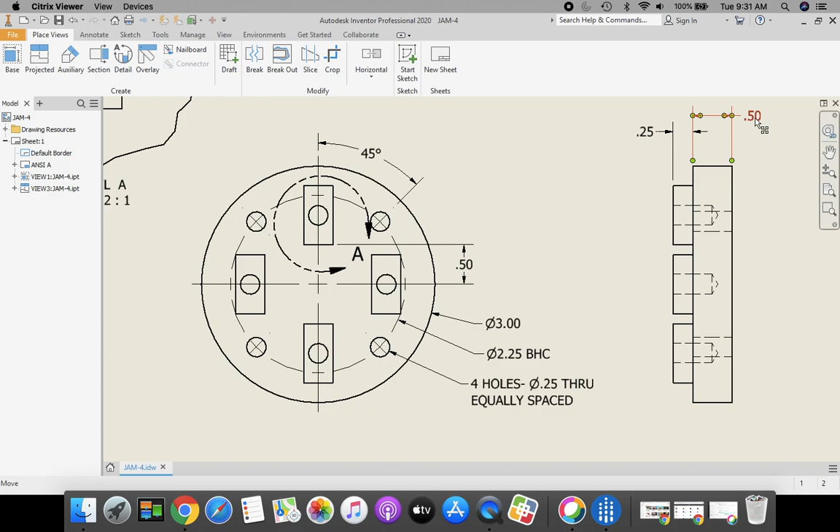Starting off, we're going to start with our 3-inch outside circle, which is this area right here, and we're going to extrude it back 0.5 inches. Some of the things we're going to be taking a look at today are techniques where we use construction lines and a bolt hole circle. We're going to introduce a new tool to you, which is called a 2-point rectangle. We're going to be doing something new as well, fixed circular pattern for those islands.

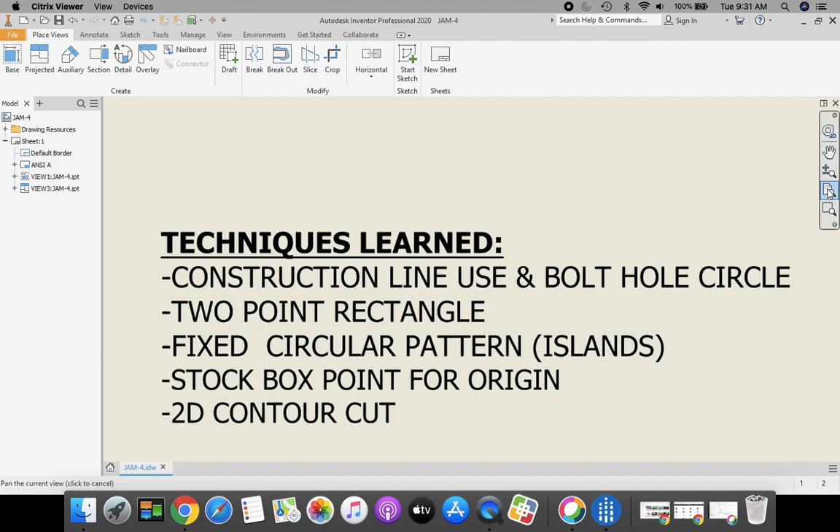And when we start CNC milling, we'll do a stock box point for our origin, and we're going to do a 2D contour cut. Also, we're going to be showing you how to enter into that detail view up here as well. Okay, so let's have a little fun today on Jam part.

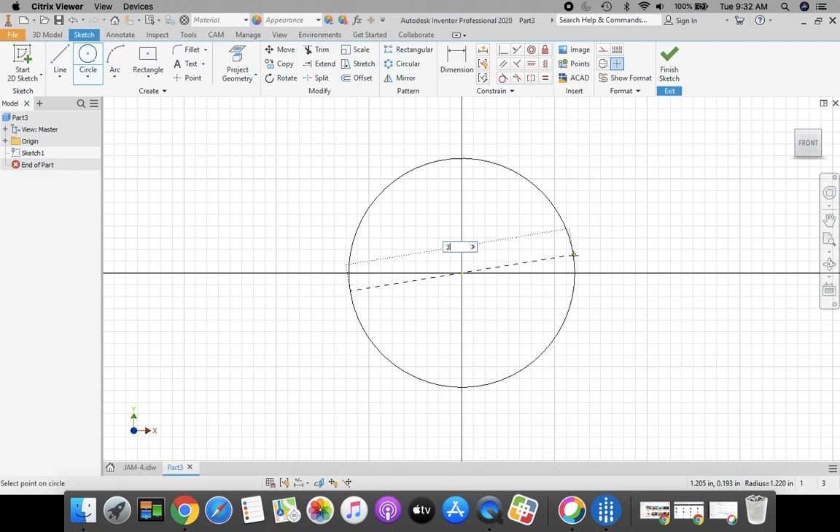From our main Inventor screen, let's go to New, Standard IPT, and click Create. We're going to begin with a 2D sketch from our XY plane as always, and click Front in your View Cube. Starting off with my circle, I'm going to start at the origin, get my green dot, stretch out a circle. This is going to be 3 inches. Press Enter on the keyboard. Green check mark, Finish Sketch. I'm going to go home.

I'm going to extrude next. I want to extrude, as always, my first extrusion, direction number 2, which is that flip direction. And I'm going to enter in a distance here of 0.5. Press Enter on the keyboard to show it, and then click OK on your menu.

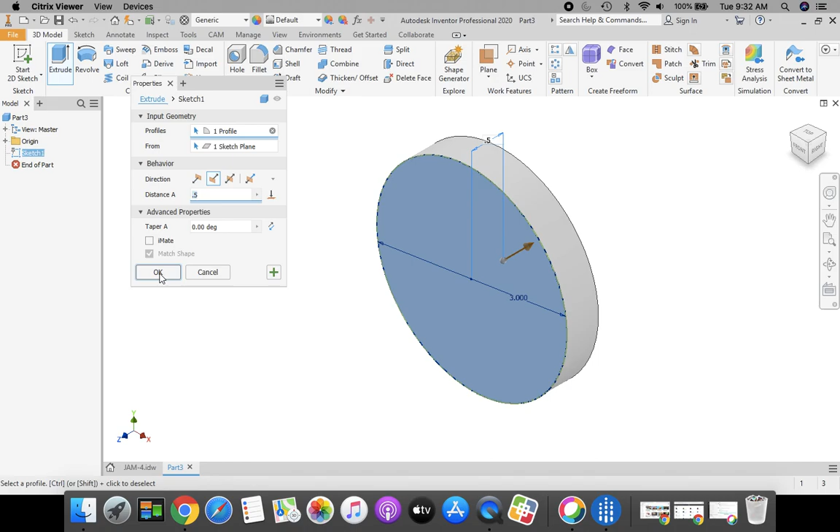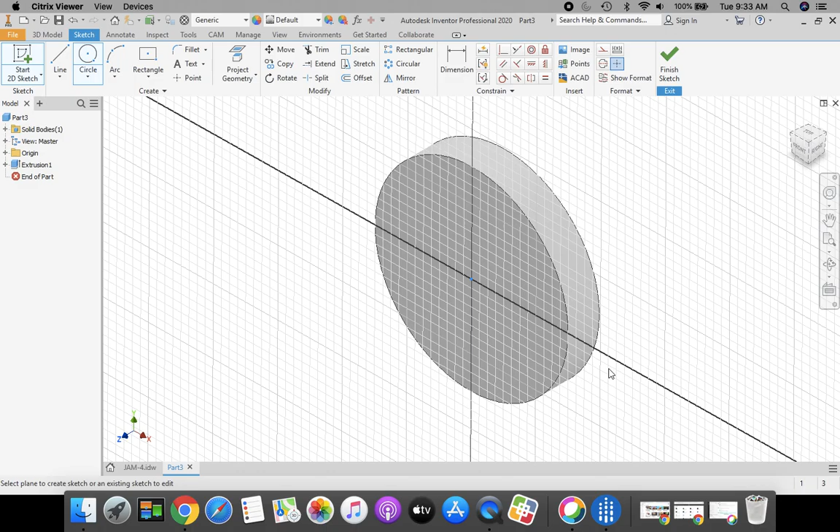Now that we have that part for the base drawn, let's take a look at these holes. We're going to have to enter in a vertical and angular sketch line at 45 degrees. And we're going to have to place another construction line coming around here for our bolt hole circle, which is 2.25. Okay, so let's begin with that. 2D sketch on our front view. Click Front in your View Cube, or you can click Zoom All, magnifying glass piece of paper on the navigation bar on your right hand side.

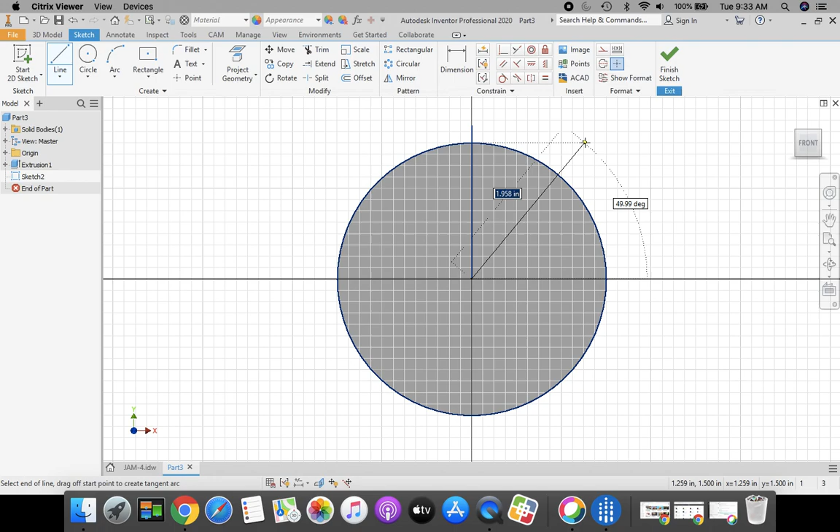And we need to get those construction lines in there. So I'm going to start at my origin with my line tool, and I'm going to make sure that I'm perfectly vertical, getting that vertical snap to pop up, that little gray box on the side. Click, press the Escape key. I'm going to get another line starting from my origin, and sketch out another line at an angle out here. Click to place it, press the Escape key.

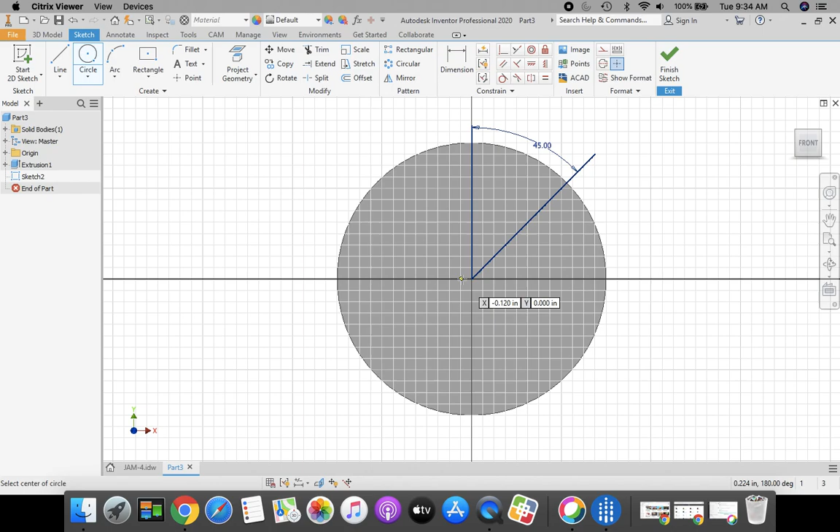Now let's dimension this to that 45 degrees. Get your dimension tool. We're going to dimension from the vertical line to the angular line, and enter in 45. Enter on the keyboard or green check mark. Now we need that bolt hole circle coming around. If we take a look at our drawing, it's 2.25 diameter. See that right here? Let's go back to our part. That's going to be done with a circle. We're going to place that at our origin, stretch out a circle, and this diameter is going to be 2.25. Enter on the keyboard.

And now we need to place that point. So we're going to come up to our top area in our ribbon bar and click Point. If you have to zoom in, that's fine, but the cursor is going to lock on to the intersection of where this angular line and that bolt hole circle are. Once it locks on there, click to place it. And now we're going to circular pattern that. We could also finish sketch and circular pattern a feature, but I'm going to circular pattern that sketch right now.

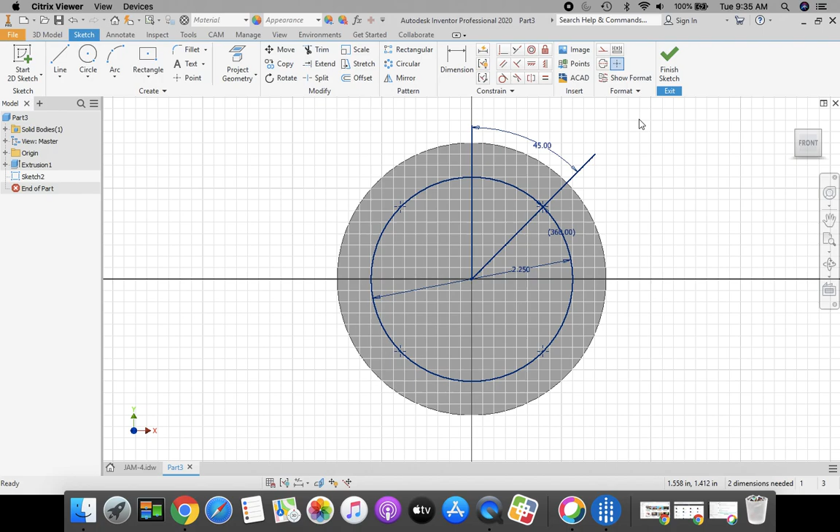So when I circular pattern, I'm going to select my geometry, which is just that one point. Then I'm going to get the pick tool for my axis and click my origin, which is the center of my part. By default, it comes up with 6. I'm going to change that to 4. And I do want it to rotate 360 degrees. So click OK. Now I have those 4 points going around. The construction lines that are on here, we can just leave them. Green check mark, finish sketch. I'm going to select my hole tool.

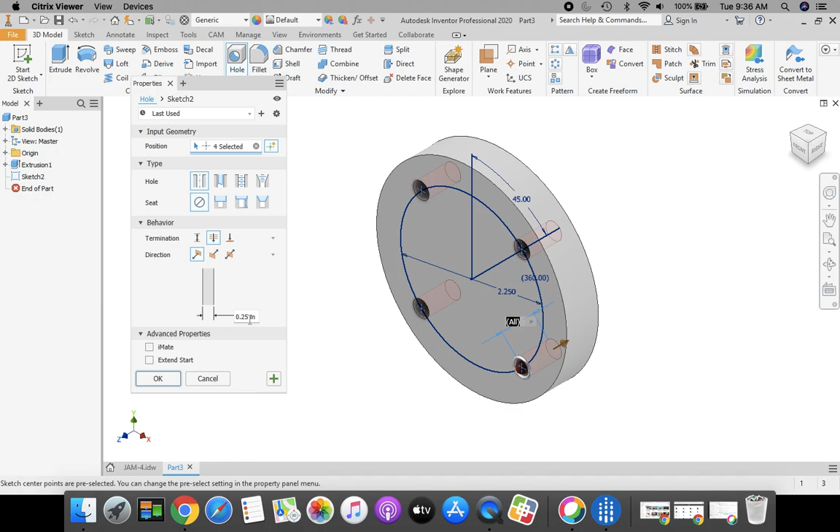Now before we get going on this hole tool feature, let's take a look here. These 4 holes are diameter of 0.25 and they go all the way through. Going back to our part, my hole feature up, I'm going to have a simple hole with no seat. I want to go all the way through, so my termination distance, I'm going to change from a distance to through all. And then my diameter, I'm going to change to 0.25. Once you have those things done, click OK.

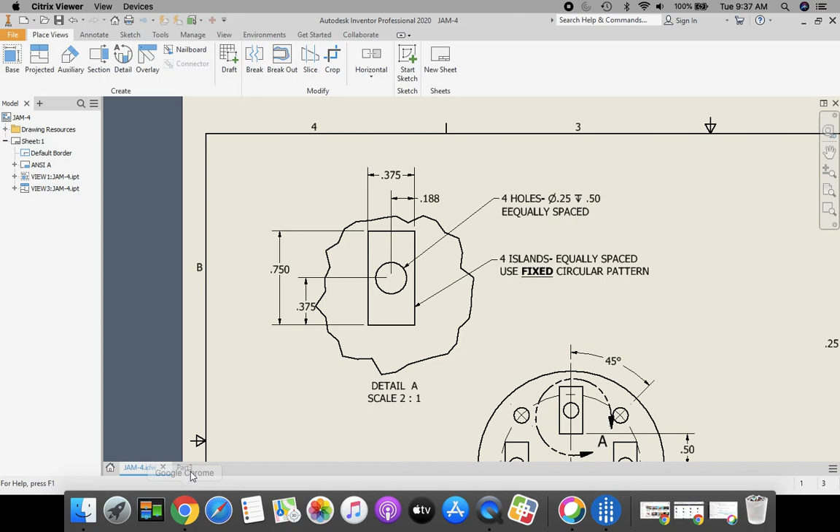Alright, next, let's take a look at our islands that are up here. On our front view, I can see I have one dimension here that positions my island a ½ inch up from the center. However, there's no other dimensions on here, and that's where I'm going to refer to my detailed view. So the overall dimension is 0.375 by 0.75 vertically for this island, and there's going to be a hole placed in the middle. Okay, let's start working on this.

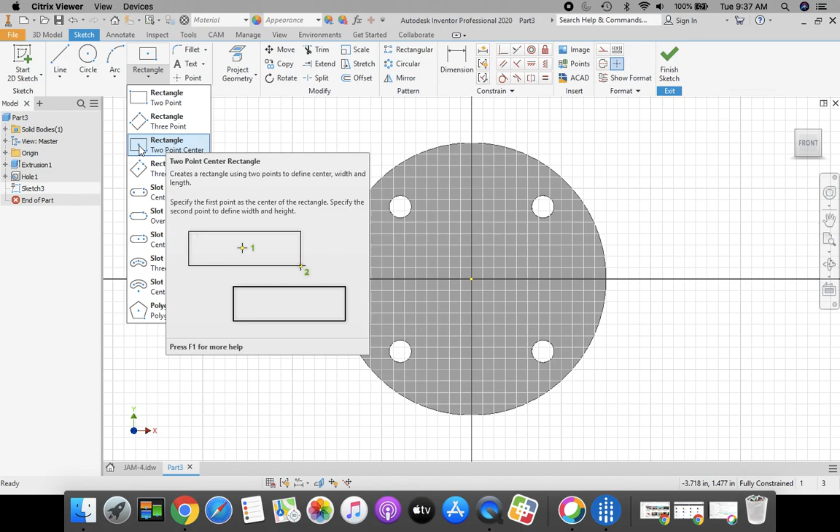Going back to my part, I'm going to take a 2D sketch, place it on my front view, and right at the 12 o'clock position is where I'm going to start. This is a new tool for us. If we come up here to our rectangle area, the button that's on the bottom, I'm going to click on that and I want to go down to rectangle 2 point center, and that gives me the center and one of the corners, so I can make sure that this is placed at that y-axis by my part. I'm going to come back up here and I want to be locked onto my y-axis, and I'm going to click and I'm going to stretch out a rectangle.

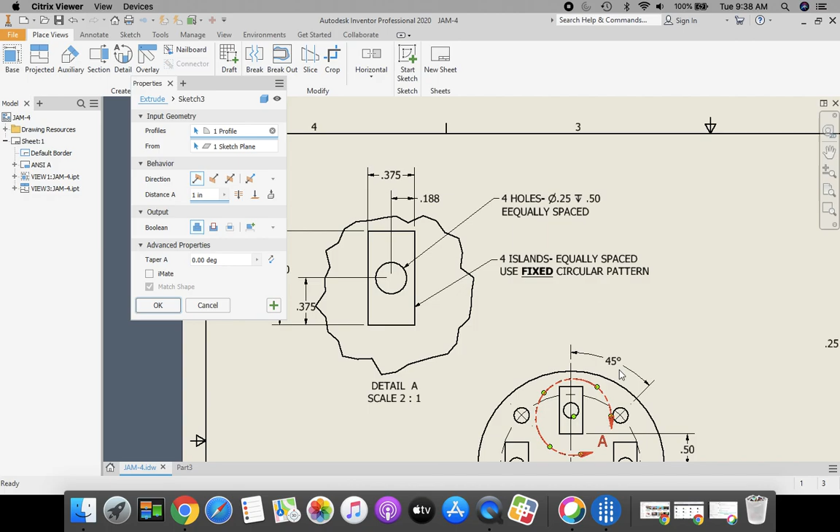And the distance of that rectangle was 0.375 for the horizontal. Press the tab key. My vertical is 0.75. Enter on the keyboard. And now we need to position that for how high it is up off the center. So I'm going to get my dimension tool. I'm going to select my origin and the bottom of this rectangle that we just created. And this distance was 0.5. Okay, that looks great. Let's green check mark finish sketch.

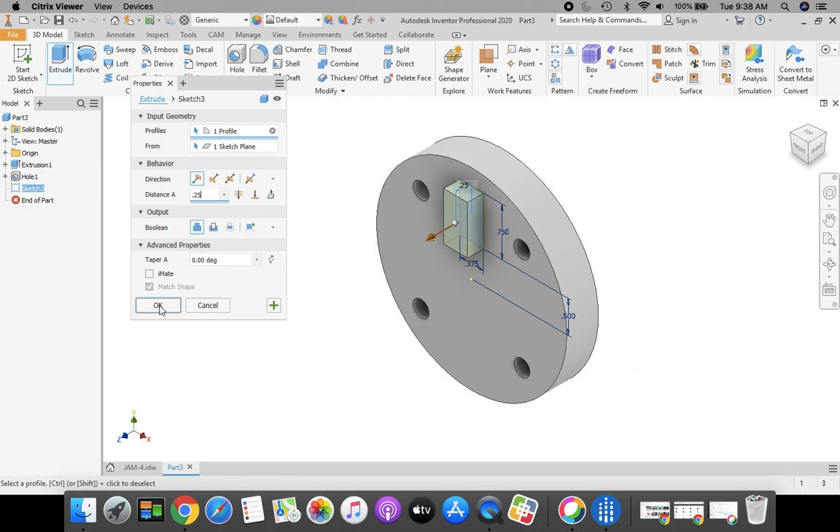We're going to extrude. And I don't remember what that dimension was, so let's bring up our drawing. We can come over here to the side and we can take a look at our drawing. This island shown here, we're going to extrude it 0.25 going in direction 1, or that default direction. Okay, going back to my part. So I have it in default direction, showing that it's coming out towards us, and I want to change my distance to 0.25. Okay, that looks good. Click OK.

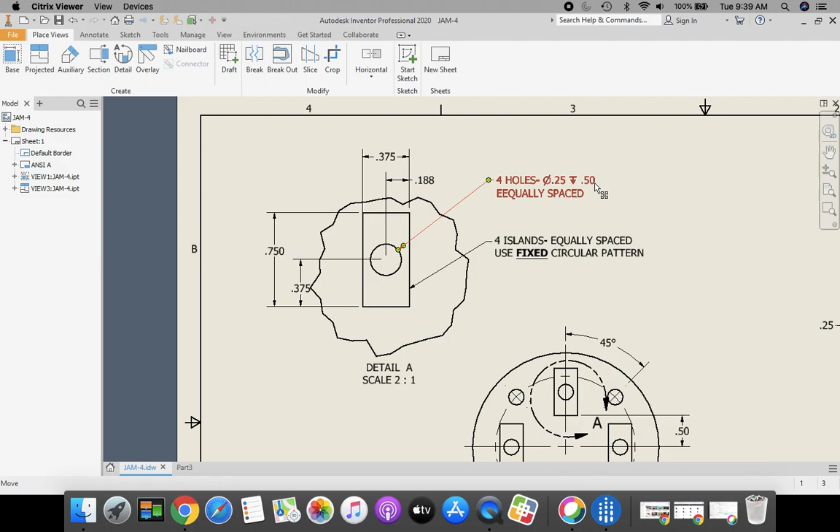Before we revolve this around or circular pattern this around, we're going to take and place that hole in there as well. So let's take a look back at our detailed view. The center of that hole is 0.188 in from the side and 0.375 up from the bottom. And those holes are a diameter of 0.25, but they only go a ½ inch deep, 0.5 deep. Okay? Let's go back to our part.

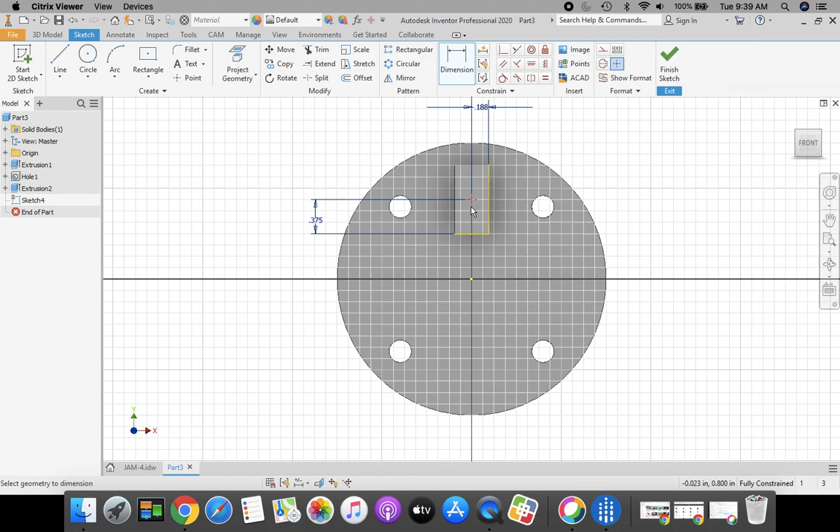We're going to take a 2D sketch, place it on the top of this island. And then I'm going to get my point tool, place a point on my part. I'm going to dimension from the right-hand side to that point. And this is going to be 0.188. And that should put it right in the center. I'm going to dimension from the bottom to the point. And this should be 0.375 for a dimension. And that should perfectly center it top to bottom, right to left on this island.

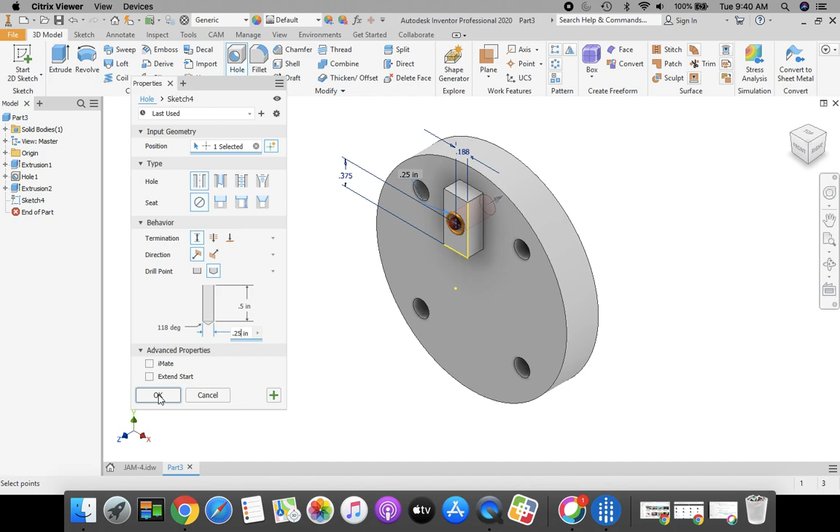Okay, let's finish the sketch using our hole tool feature. Coming down from the top again, I want to have a simple hole with no seat. I'm going to change my through all feature to a distance. I want to enter in a distance here of 0.5 and a diameter of 0.25. Once you have that done, click OK.

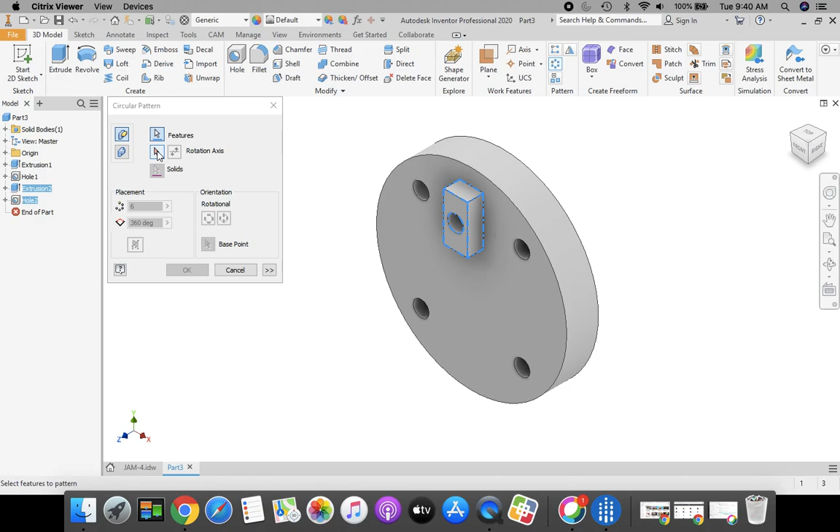Now we're going to take and we're going to circular pattern that. So we're going to come up to our pattern area, click circular pattern, select my feature. Now I'm going to take both of these. I'm going to take the hole and I'm going to take the island. So I want to have two things that I'm going to be circular patterning. Then I'm going to select my rotation axis, the pick tool here, and I'm going to click the outside of my circle.

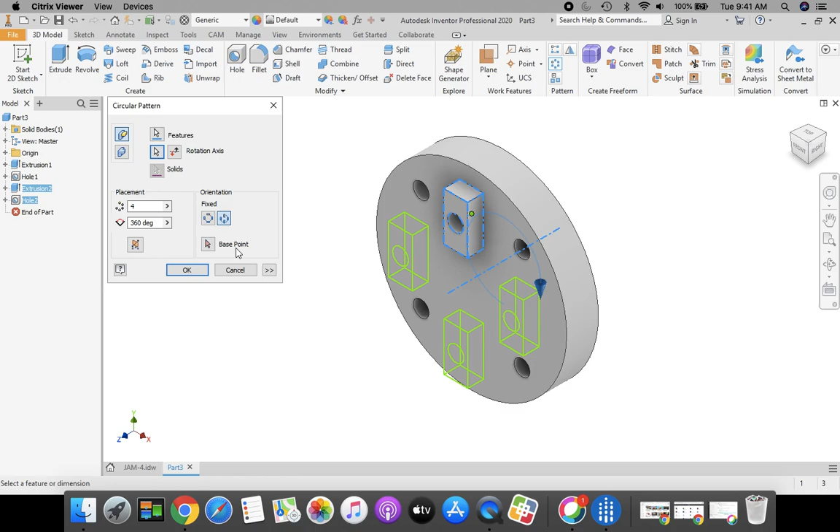Default, it comes up with 6. We're going to change that default number to 4. And then before I click OK, I want to have my fixed rotation on right here. And you're going to see what it looks like in my presentation here. It's going to keep them the same vertical orientation. Click OK. Looking good.

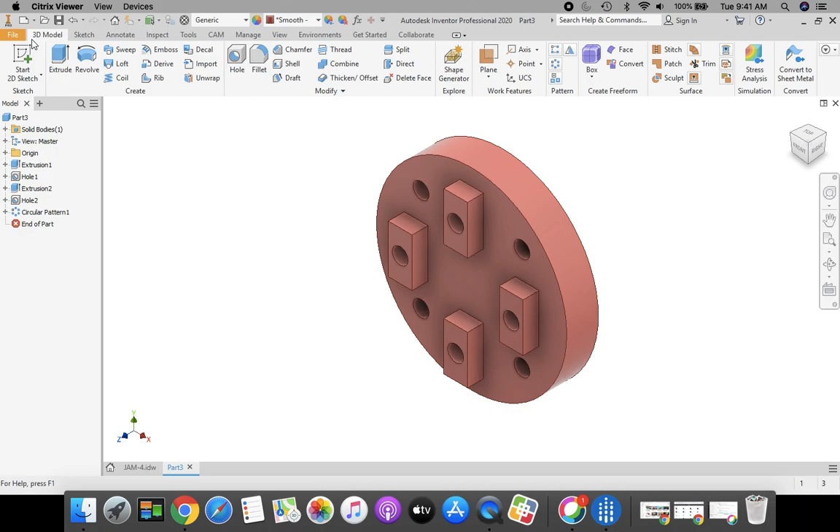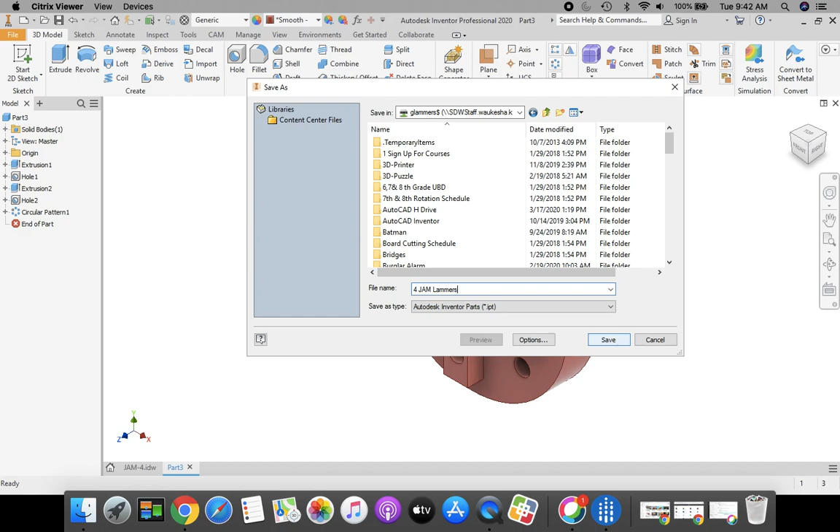Next, let's change our material type. Go up to the top, go to default, and we're going to scroll down and we're going to find smooth red. Right there, smooth red. And then we're going to go up to File. We're going to go down to Save As. Make sure that this is going into your H drive. Click on the pull-down menu here. Go down all the way to first initial last name 000, the gray box with your green line on it. We're going to give this a title of 4 JAM, and then your last name. And click Save.

Great job. The next video is going to be how to run our toolpaths, drilling these holes and cutting around these islands that are up here. Stay tuned for the next part for our CAM toolpaths.